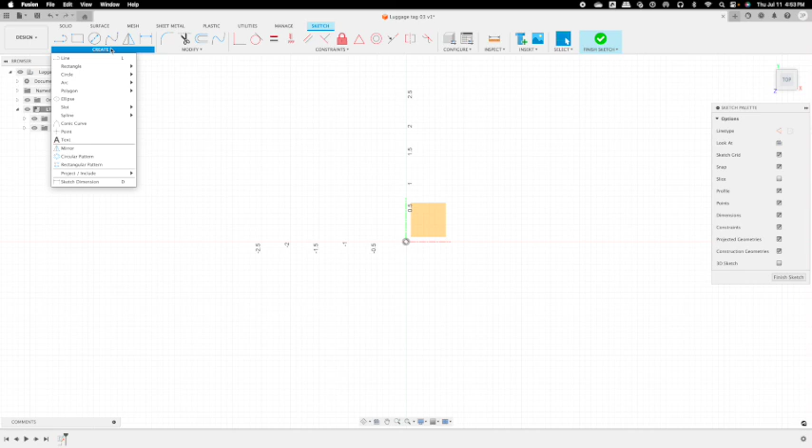We're going to create a center rectangle. The dimensions will be 4 inches by 1.5 inches.

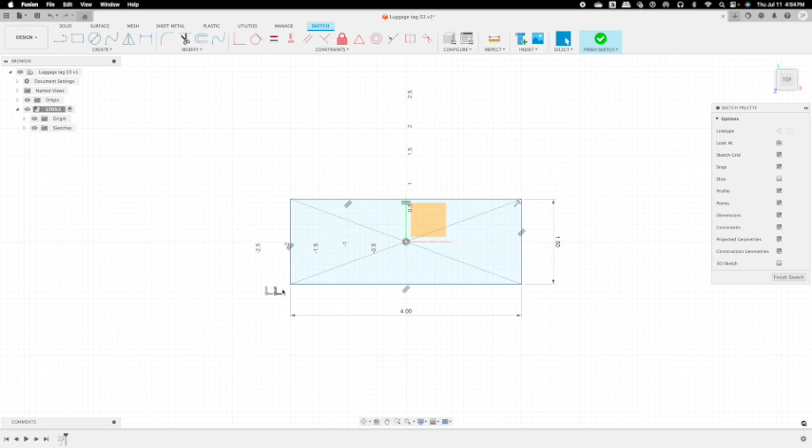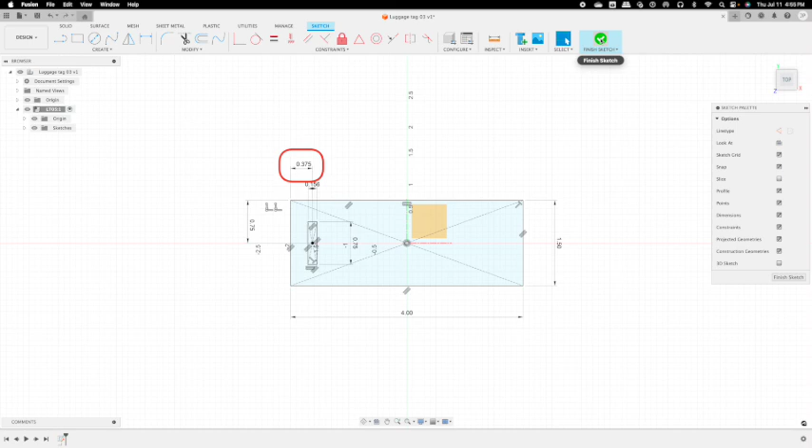Now that we have that complete, we're going to make another rectangle for the lanyard. We'll say create center rectangle. The lanyard slot is going to be 5/32, which is 0.156, by 3/4, which is 0.750. It'll be centered on the luggage tag and 3/8 inch in from the end, which is 0.375.

At this time, we can say finish sketch. We're going to extrude this part so it's 3/16 thick, which is 0.187.

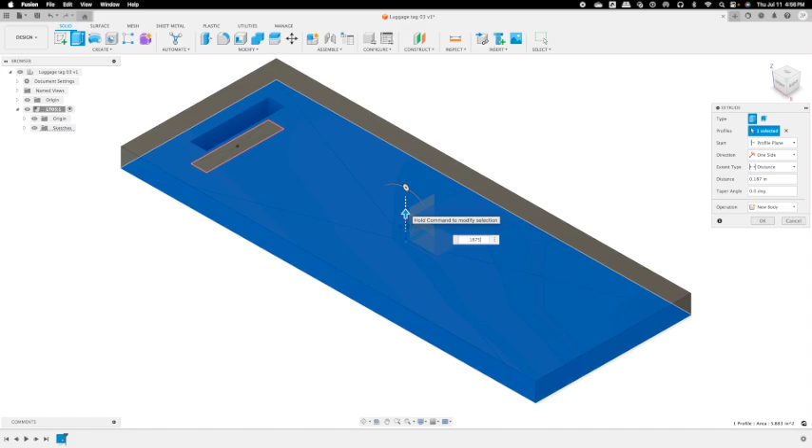At this point of our drawing, you could technically stop here, save an STL file, and send it over to Bambu Studio, where you can add either raised text or recessed text. You can clone these, put about a dozen on a plate, maybe not a full dozen, but you get the idea. You could put a number of these on the plate with multiple names, family members or friends, or quotes you like, or airplanes. You can do this all in Bambu Studio and just hit print, printing them all out at the same time.

So at this point, it'll work. But if you keep watching, we'll show you how we made our inlay version. It's a little bit extra work, but it's worth the time, I think. Let's get back to it.

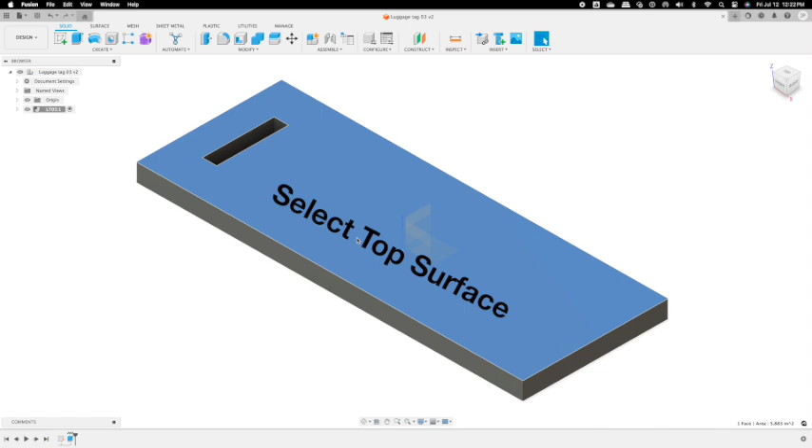Select the top surface, right mouse click, and create sketch.

Go to the drop-down menu at the top left of the screen, select create, then rectangle, and choose center rectangle. Apply it to the center of the luggage tag, with dimensions of 3 3/4 by 1 1/4.

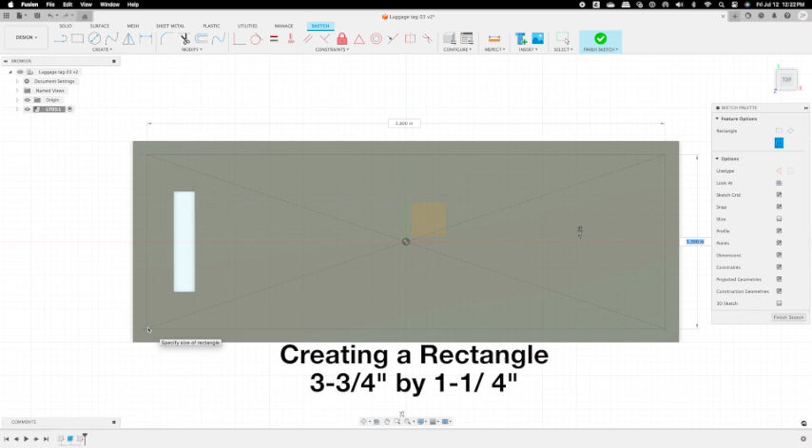Once that's complete, I'm going to apply 1/16 inch fillets to the 4 corners of my rectangle.

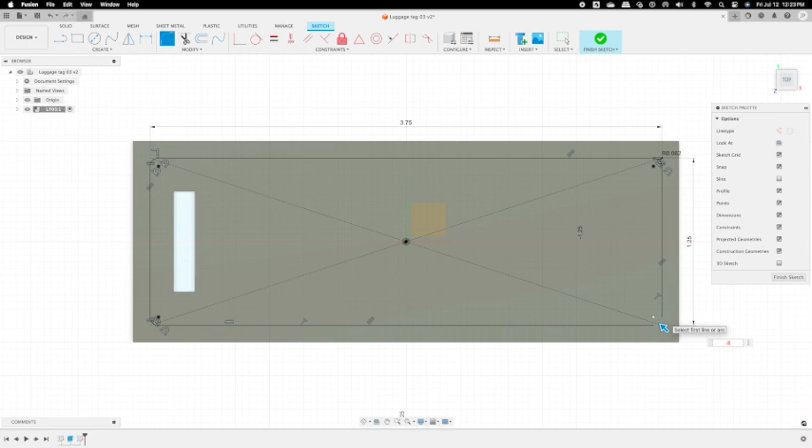And the only thing left to do here is go to the top right corner, to the check, finish sketch.

Whoa, I was watching myself. I didn't realize how boring I am. Hang in there.

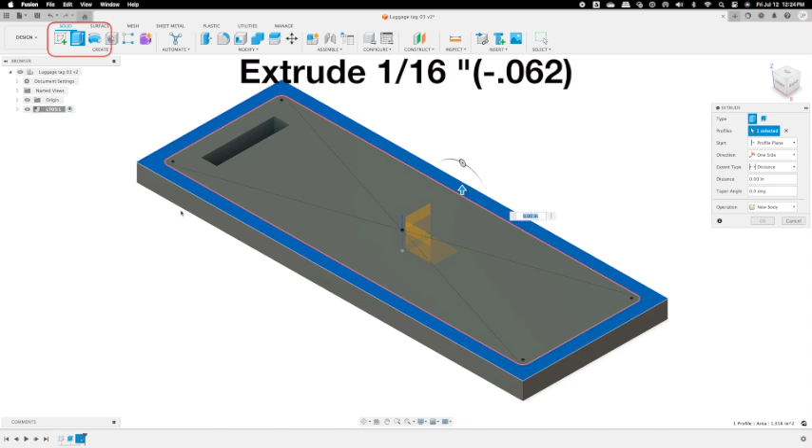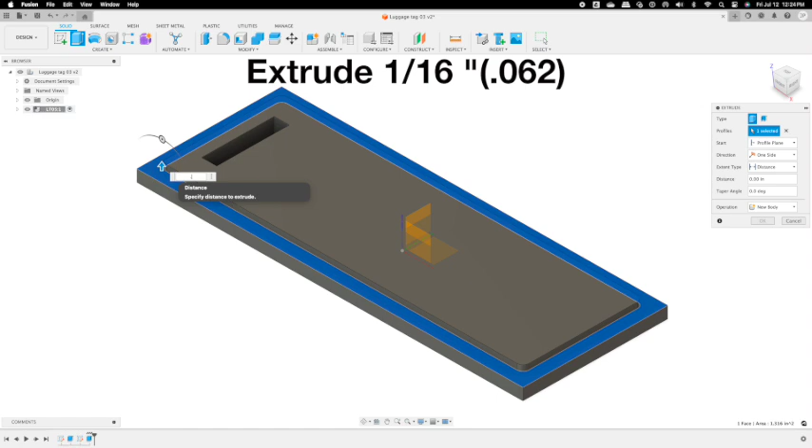So on this step, we're going to extrude the border at negative 0.062 into the material. Then we're going to extrude it again, 0.062, back to the upper surface as a new component. This will allow us to add color to our border when we import it into Bambu Studio. Try to make it a habit of renaming your components to be able to identify what they are in your manager.

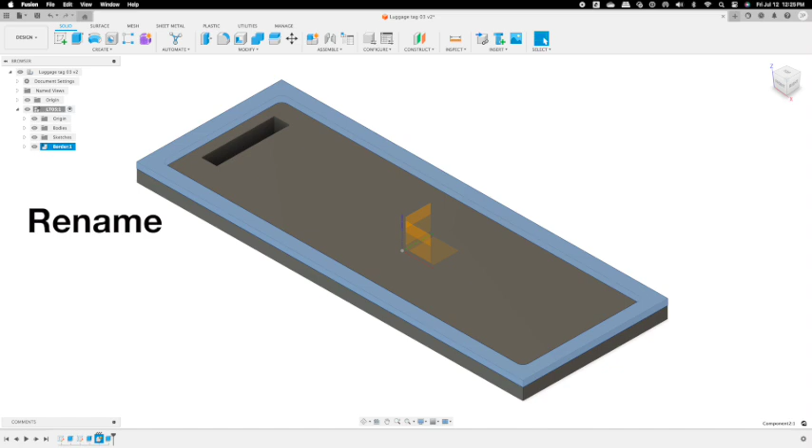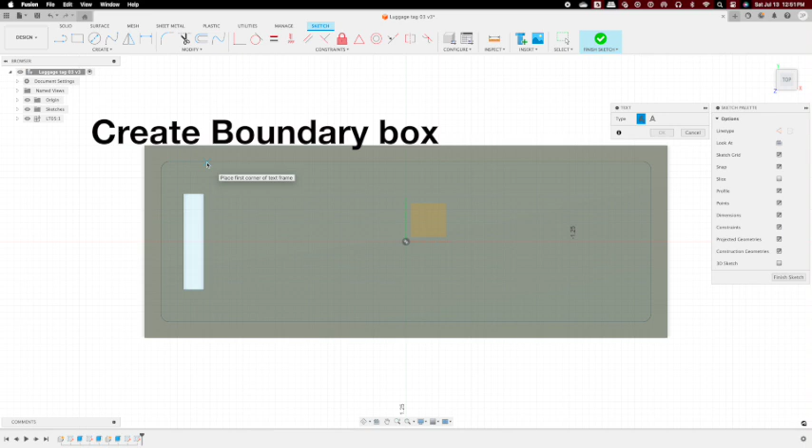Almost done here. So let's select the top surface, and we're going to create another sketch. Now we're going to add text. So go to create, select text, and then we are going to have to put a boundary box to center our text. So click the left corner, and we're going to drag it over to the bottom right corner, and this will be our boundary box.

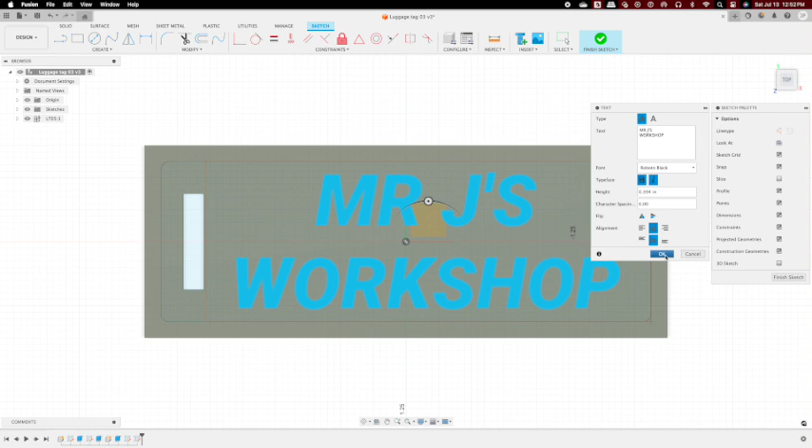So I'm going to use Mr. J's Workshop as my luggage tag information, and I'm going to type it in the upper box. I'm going to select a Roboto Black text, and I'll adjust the size and center it in the box, centered in the middle of the box.

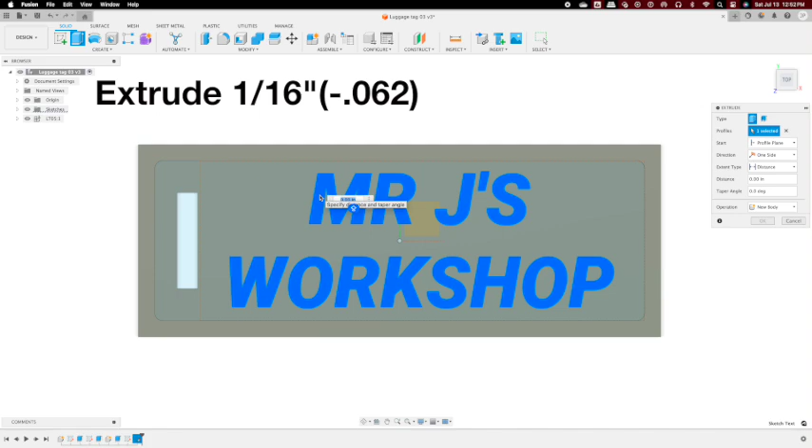Select finish sketch. We're going to extrude the text now into the luggage tag, negative 0.062. And then we will be extruding it back up to the surface again, 0.062, and create a new component. That way this will allow us in Bambu Studio to add coloring.

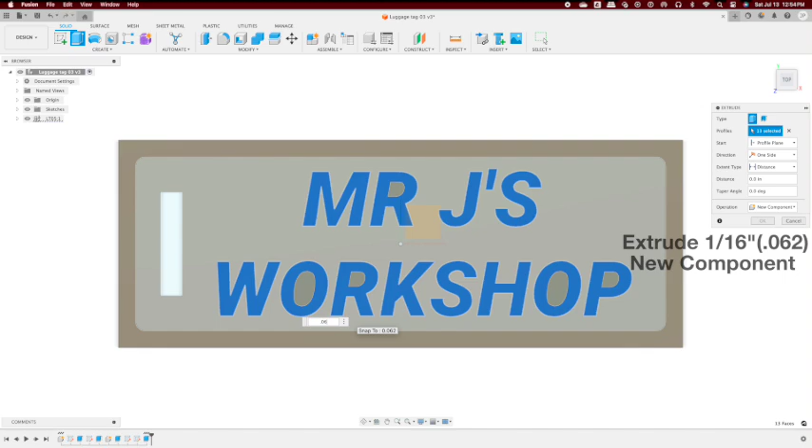So we're almost done here. We're just going to add some fillets on the outside, 1/8 fillets. And then we're also going to add 4 fillets in the lanyard slot, and we're going to make that 0.078.

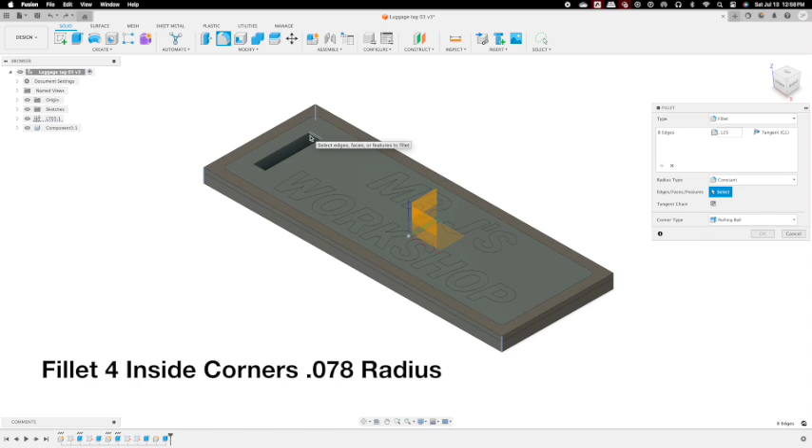So that completes our luggage tag. The only thing we have to do now is change my units of measurement back to millimeters because we were working in inches. For some reason, Bambu Lab does not like that. So we're going to change the units back to millimeters. And then we're going to save the file as an STL file.

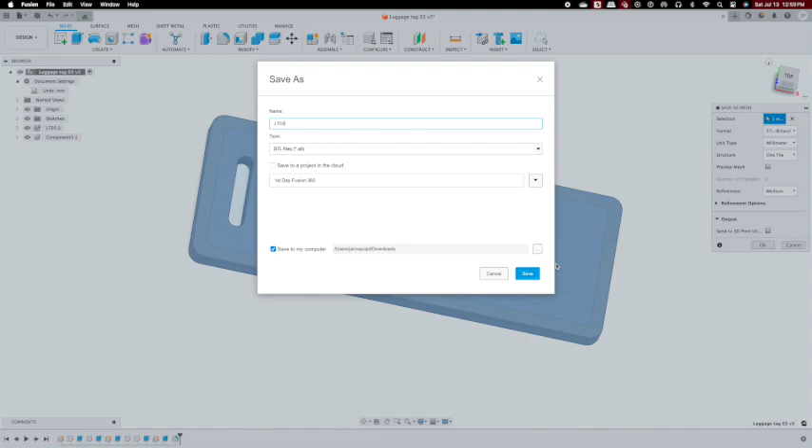So we're in Bambu Lab. We're going to select New Project. Go to the left under Objects. Right mouse click, select Split, and then Parts. Now our luggage tag is broken up.

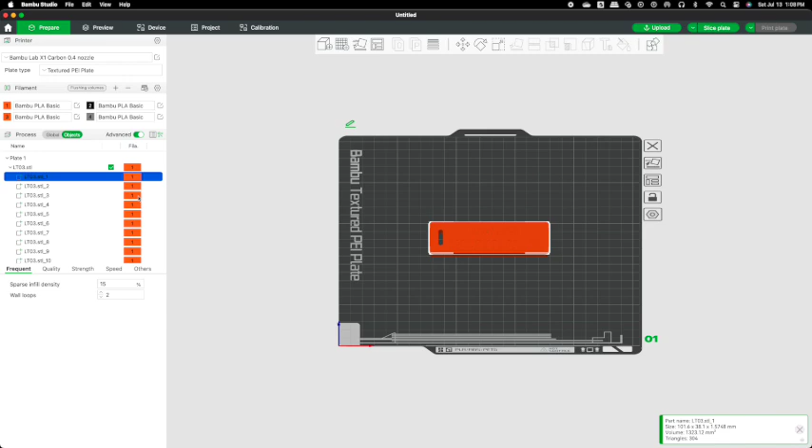And we can select the text and the border and change its color. In this case, we're going to change it to black. I've done this a couple times, so I know exactly which parts need to be changed.

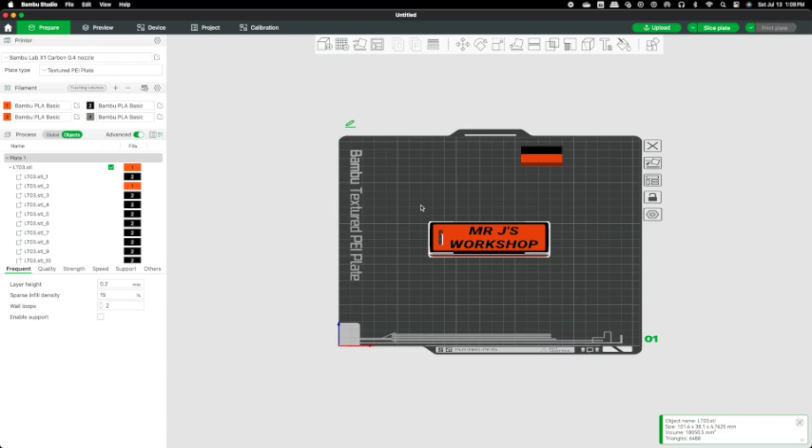So the only thing left to do is lay the text face on the texture plate. I really like the finish I get that way. So I need to rotate the luggage tag 180 degrees so the text lays flat on the texture plate. And then what we could do from here is slice and then select print.

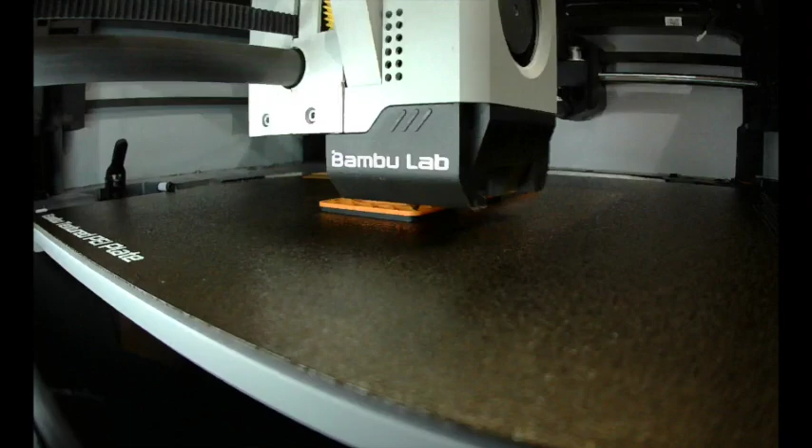We have our project. Another thing that I did on this project is I put a recess on this side. The reason for that is I'm putting a nameplate tag in there that I'm going to laser engrave. So I can have a generic image on here, like say Mr. J's Workshop, and I make a batch of these, and then I could go to my laser and just customize what nameplates I want on the backside and use double-sided tape. So that's my tip to you.